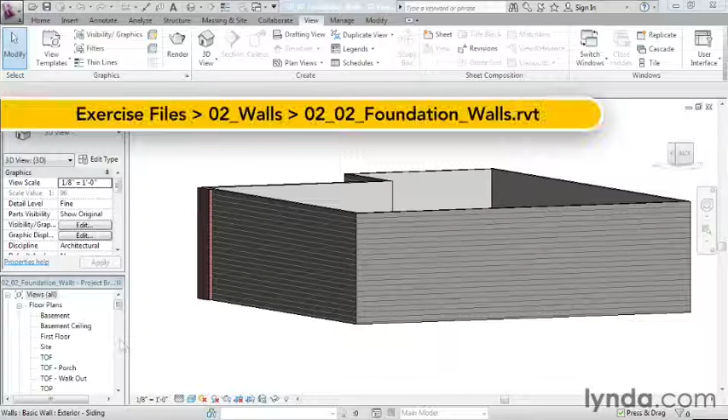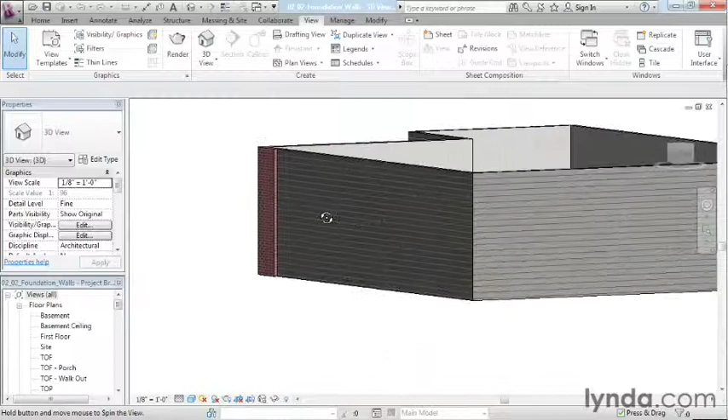If I spin this model around, you can see we have the outside walls here. What we're looking at is the siding coming down. Even if I spin it around, we can see the brick coming down here. We're going to need something to support the brick, as well as the underside to support the actual structural members of our walls up above.

So in order to accomplish that, we need to go to our first floor view. In our first floor view, we can see all those different layers and materials pretty easily. The only problem is I have some nice big dark thick lines here.

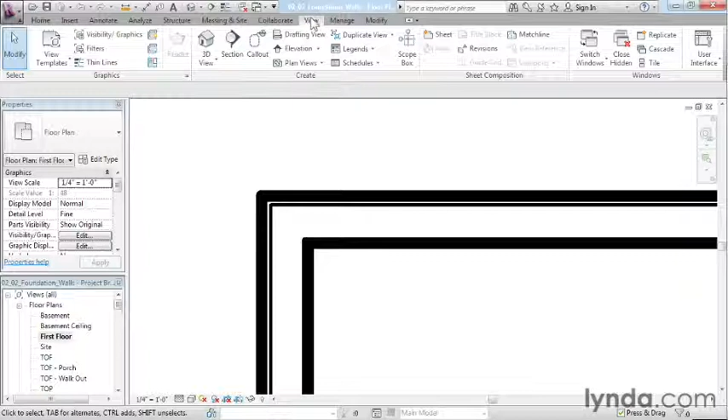In order to see each individual layer of material, you need to make sure you come up to your View tab and select the Thin Lines tool. By doing that, you can see the individual pieces that make up this wall.

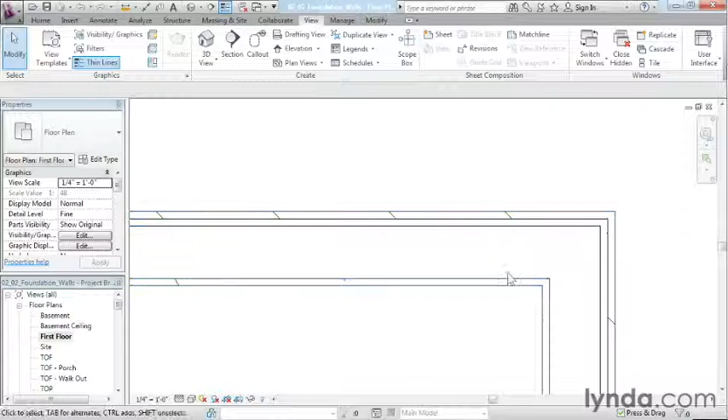Now the important thing whenever we're doing this foundation is making sure we draw the foundation to the outside edge of our structural members. What's holding up this wall isn't actually the siding, it's the 2x4s inside the interior of this wall. That goes along this line and down, and along this line and down. So the foundation wall needs to be totally underneath this area in order to hold the floor above it up without falling down.

One thing though - it's very tempting because in the first floor, one of the things we had done was draw everything here in the first floor view. So it's very tempting to come into the basement view and just start drawing. But the first thing you'll notice is that you can't see the walls because they're up above.

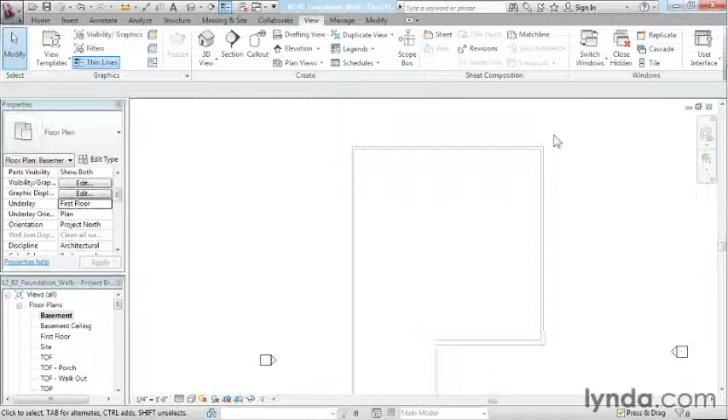Experienced Revit users might try to come in and change the underlay to show the first floor and then start drawing around. The problem is if we zoom in, it's very difficult to tell where the structural members are going to be because it doesn't show that with an underlay. It's vital that we know where the structural members are, so when we're drawing these walls around, they're at the right locations and not a few inches off, which would cause the whole house to collapse - never a good thing, obviously.

I don't like to start off by drawing my basements, particularly when we're dealing with houses down in the basement level. Oftentimes I'll do it in the level up above, the level we're actually supporting.

Now, where we have the underlay turned on here, I'm going to turn that back off because I don't really need it anymore. Move this up, change this to say none. You can see how it goes away.

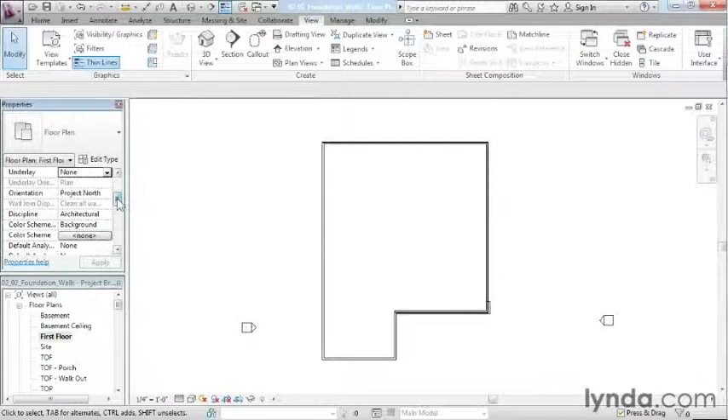And now I'm going to go back to my first floor view. One setting I need to adjust though, in order to see those walls down underneath, is called the view range setting. By clicking on the edit button, we can adjust that view range to see the level below, which goes to the top of foundation. I'll click OK to that.

Next, I'm going to start drawing in my basic foundation walls that go around the perimeter of this building. I'll come up here to the Home tab and select the Wall command. Now I have to be very careful, because if I'm drawing on the first floor, it's going to try to put all these walls in on the first floor. So I need to tell these walls that they need to actually go further down.

Now, where I want to put these walls is going to be where it has base constraint and first floor. I want to click there, and I'm going to bring it down to the farthest point down, which is going to be the top of footing for the walkout. We will need to adjust some of these walls a little later on, but right now I'm just going to draw the walls all the way around the perimeter, and we can always make adjustments after the fact.

Next, there's a base offset here. We don't need a base offset because we don't need the bottom of the wall to be any place other than right on top of the top of footing for the walkout. So we're going to change this to be 0, so there is no base offset.

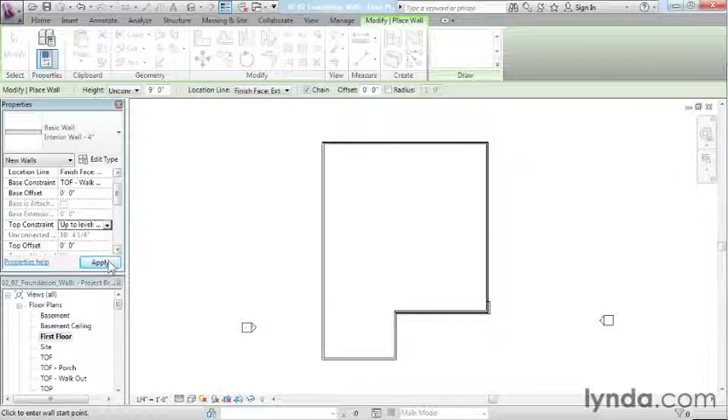The top constraint, whenever we're doing a foundation wall, should usually go up to the top of the foundation wall. So we're going to go up to the level, top of foundation. This information looks pretty good.

So I'm going to start by coming in and drawing the wall. One thing we need to do though is make sure that we change this wall type to be an appropriate foundation wall type. We have 3 different ones available to us. One's a foundation 8-inch. The foundation 8-inch is a typical 8-inch thick foundation wall, poured concrete.

You have the foundation 8-inch finish. This is going to be a foundation wall that has a finish material on the inside of it. So if your walls have gypboard and some studs there in order to be able to hang your pictures on the wall and that sort of thing, this is the wall you want to use.

There's also the foundation 12-inch finish. This one you only need to use down here. The reason why you need this 12-inch foundation wall down here is to be able to support the brick that's been designed up above, and we can see that from the outside of our building.

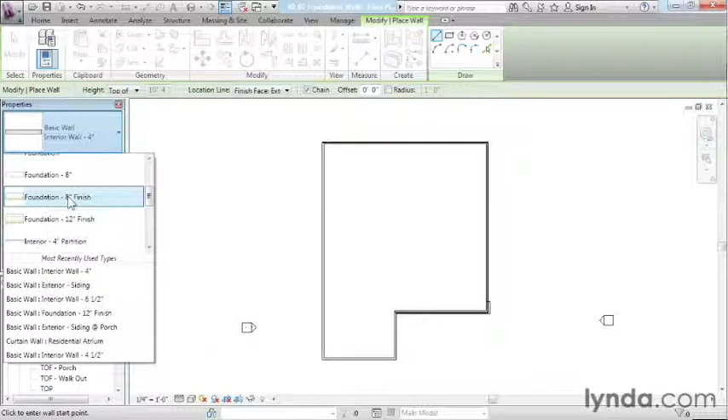For the walls that we're going to be doing right now, I'm going to choose the foundation 8-inch finish, and it can be adjusted later in places where it needs to be a slightly different wall type.

Now I'm going to come over here. After I change these properties, I'm just going to verify that these properties are right. Usually they are. They still are. And I'm going to click this intersection right here.

But first, I need to come up here where it has the location line, and it says finish face of the exterior. In reality, I really needed to say core face of the exterior. Why? Because by doing the core face, it's going to allow us to line up the structural members of the walls down below as well as the walls up above. This is the structural core here.

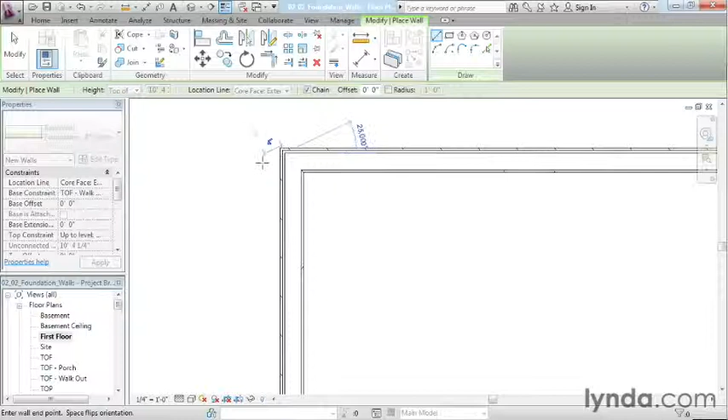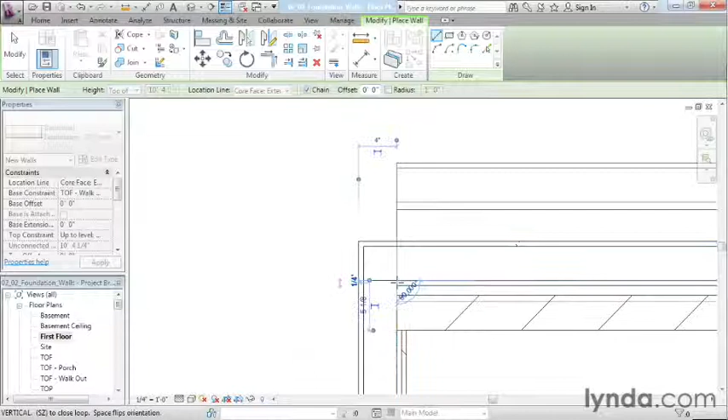So I'm going to click at that intersection point right there, and I'm going to move over in this direction. And I'm going to click again over here. You can see the foundation wall start to get drawn in. I'm going to move down. I'm going to pick this intersection right here. I'm going to move over, pick that intersection. And now it's just a game of connect the dots, essentially, just moving all the way around our building, picking those individual intersection points.

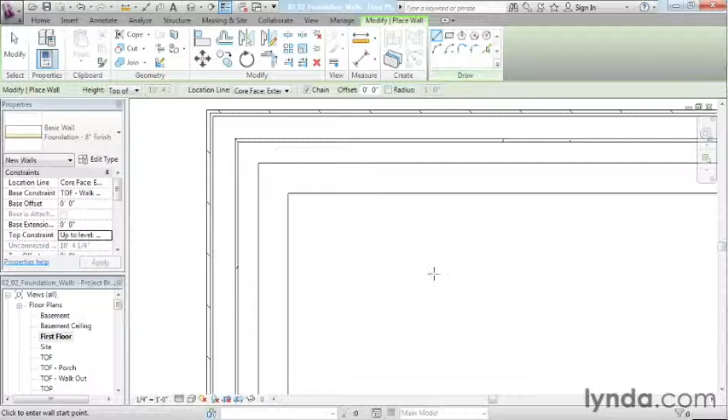By doing this, we'll now have a foundation wall that's completely underneath the structural members of our house up above. Now, once you've went all the way around, you can hit escape a couple times to get out of the command, and you can take a look at it in 3D. If you spin your building around, you'll be able to see those foundation walls on the underneath side going down to the appropriate depth.

Now we need to be able to move on and make adjustments to these walls in order to make sure that they completely support the brick up above and have the right structural capabilities to be able to hold our house up without the house falling down on itself.